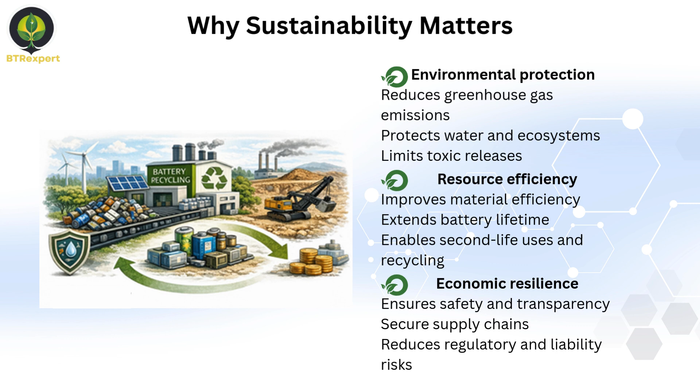The environmental footprint of battery materials is driven mainly by upstream stages: mining, refining, and precursor manufacturing. These steps are often energy-intensive and can account for a large share of life cycle greenhouse gas emissions, especially when powered by fossil-based grids. Extraction and processing also create non-climate impacts, including land disturbance, ecosystem damage, and waste generation. If environmental controls are weak, local air and water pollution can be significant.

Water use and water quality risks are critical in several supply chains. Material production can require substantial water and can generate contaminated effluents, while global transport across multiple countries adds further emissions and environmental burdens. Footprints vary by chemistry and material mix.

Cobalt and nickel-based cathodes often have higher upstream burdens, but all chemistries rely on inputs like aluminum, copper, and graphite. Reducing impacts requires cleaner energy, higher material efficiency, longer lifetimes, and strong recycling that displaces virgin production with secondary supply.

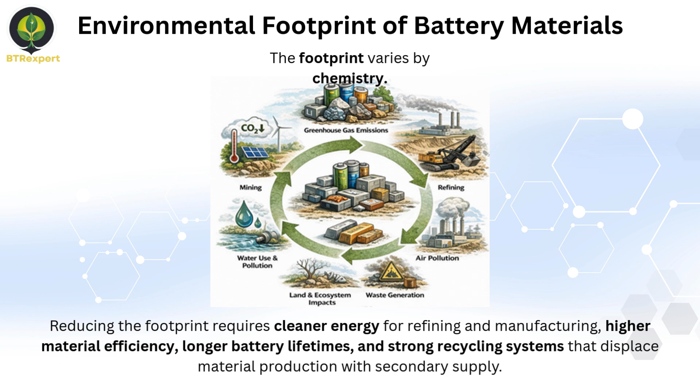Battery recycling provides clear environmental benefits by diverting hazardous materials from landfills and reducing demand for virgin mining and refining. Recovering lithium, cobalt, nickel, manganese, and lead conserves finite resources and often lowers energy use and greenhouse gas emissions versus primary production. It also reduces local pollution and health risks when handled through proper collection and controlled treatment.

This prevents toxic releases, such as lead and acidic electrolytes from lead-acid batteries and reactive electrolytes or metal-bearing residues from lithium-ion systems, into soil and groundwater. Well-run recycling facilities mitigate safety risks, including fires from improper storage or disposal, and manage wastewater, dust, and solid residues using emissions controls and waste treatment. These safeguards are essential to avoid shifting impacts from one pathway to another.

Recycling supports a circular economy by turning end-of-life batteries into inputs for new products. Higher recovery yields, improved purification, better collection, and design for recycling with traceability maximize displacement of virgin materials and strengthen a more resource-efficient energy system.

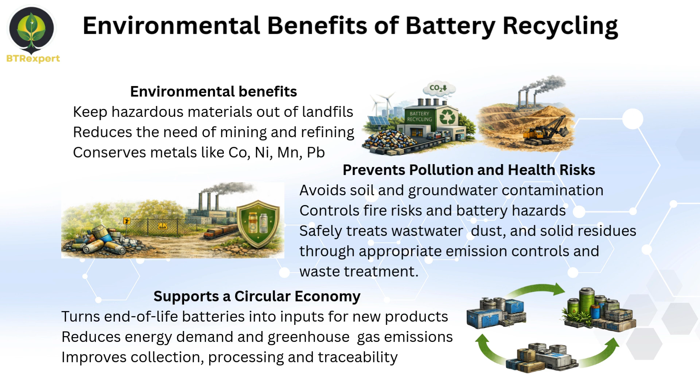Battery recycling can deliver strong sustainability benefits by recovering valuable materials and reducing reliance on virgin mining, but it also introduces environmental trade-offs. Outcomes depend on the chosen process, energy sources, emissions controls, and how wastewater and solid residues are treated, since impacts can shift between climate, air, water, and hazardous waste. A key trade-off is energy use versus recovery efficiency.

Thermal processes handle mixed feedstocks and simplify separations, but high temperatures increase energy demand and require robust off-gas controls for particulates and hazardous emissions. Hydrometallurgical routes can achieve high recovery and battery-grade purity, yet they depend on chemical reagents and can generate wastewater, salts, and sludges that require neutralization and secure disposal.

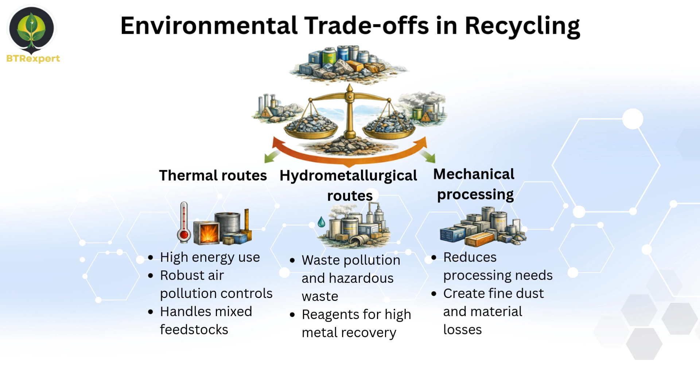Mechanical pre-treatment can reduce downstream processing needs, but it may create fine dust and material losses if containment and filtration are insufficient, making controls and operational discipline essential. Battery recycling involves important safety and logistics trade-offs, particularly for lithium-ion batteries. Transport, storage, and dismantling can create fire risks, requiring controlled discharge, certified packaging, and trained handling.

These safeguards reduce incidents but add cost and can increase operational energy and material use. Producing higher purity, battery-grade recycled materials can also require extra processing steps. While this improves circularity and market value, it may raise energy demand and generate additional secondary wastes.

Because impacts vary by process and site, recycling performance should be assessed using detailed mass balances and life cycle assessment with measured data on emissions, effluents, residues, and energy use. This avoids overstating benefits or overlooking shifted impacts. The most sustainable outcomes typically combine high collection rates, efficient pre-treatment, low loss separations, clean energy inputs, and rigorous pollution controls. This ensures material recovery benefits are not offset by new impacts in air, water, or hazardous waste streams.

Second life batteries can improve sustainability by extending use before recycling, increasing the total energy delivered per unit of material and manufacturing impact. Batteries that no longer meet first-use requirements may still be suitable for less demanding applications such as stationary storage, backup power, or renewable buffering, which can defer new battery production and reduce near-term demand for materials.

Improved battery end-of-life management delivers major sustainability gains through waste reduction and resource conservation. Batteries contain valuable, and sometimes hazardous, materials, so landfilling or improper handling wastes resources and increases risks of contamination to soil and water. Controlled collection systems reduce hazardous waste and prevent pollutant release.

Recycling and reuse conserve resources by returning materials to supply chains and reducing the need for virgin extraction. Recovering lithium, cobalt, nickel, manganese, and lead, along with copper, aluminum, and graphite, lowers mining and refining demand and associated land disturbance, energy use, and emissions. Second life applications further improve resource efficiency by extending service before recycling and delaying waste generation.

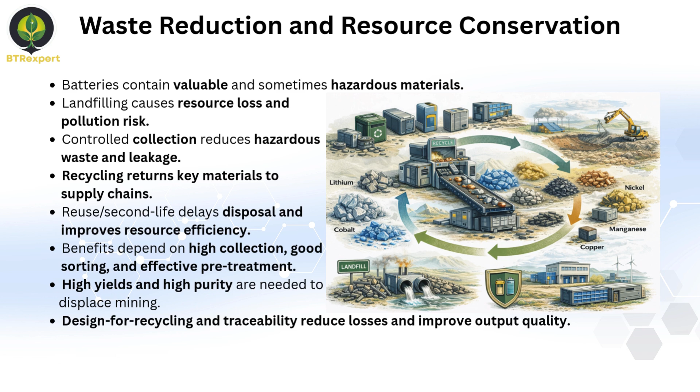Maximizing benefits depends on high collection rates, efficient sorting and pre-treatment, and recycling that achieves high recovery yields and product purity. Design for recycling, standardized labeling, and strong traceability reduce losses and improve output quality. When these conditions are in place, battery circularity becomes a practical pathway to reduce waste, conserve critical resources, and strengthen supply security.

Safety, health, and environmental risks must be managed across the full battery life cycle, especially during collection, transport, storage, disassembly, and recycling. Spent batteries can retain charge and contain reactive or corrosive electrolytes, creating risks of short circuits, thermal events, chemical exposure, and environmental releases, particularly when damaged or mishandled.

Risks vary by chemistry. Lithium-ion batteries present fire and thermal runaway hazards during mechanical stress, and leaks can create harmful emissions and contaminated residues. Lead-acid batteries pose severe risks due to lead toxicity and sulfuric acid, with potential for dust, fume releases, soil and water contamination, and high occupational exposure. Nickel-based systems involve heavy metal risks, and nickel-cadmium is especially critical because cadmium is highly toxic and must be strictly contained.

Effective risk management depends on strong procedures and engineered controls. Core measures include safe discharge, certified packaging and transport, ventilation and dust capture, fire detection and suppression, closed-loop electrolyte handling, and rigorous wastewater and residue treatment.

Worker protection and oversight are essential. Training, exposure monitoring, personal protective equipment, and hygiene practices reduce inhalation and ingestion risks, while regulatory enforcement and traceability help ensure compliant processing that protects workers, communities, and ecosystems.